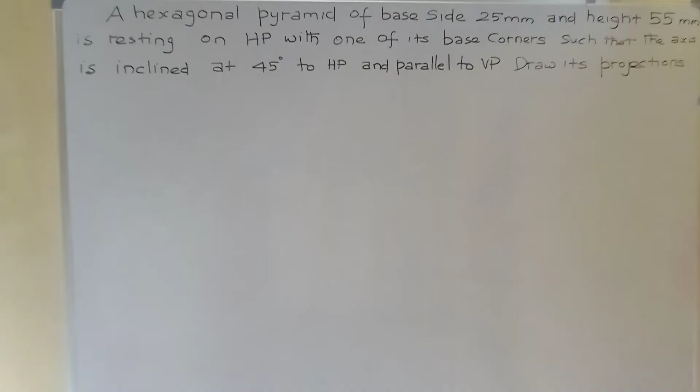Dear students, welcome. Today we are going to solve one problem in engineering graphics from a recent Anna University question paper.

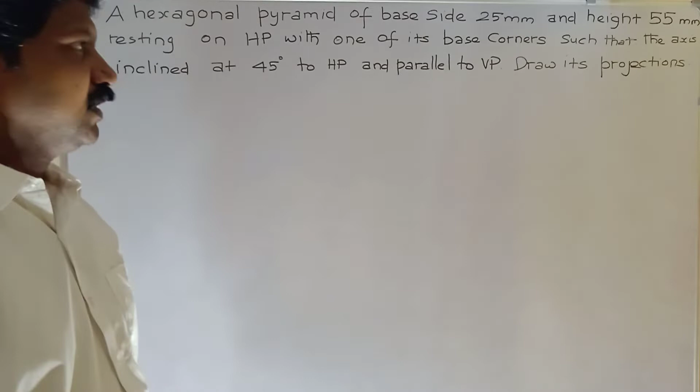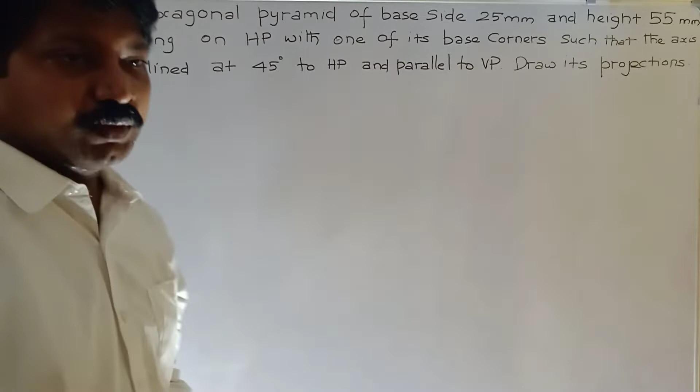A hexagonal pyramid of base side 25 mm and height 55 mm is resting on HP on one of its base corners such that the axis is inclined 45 degrees to HP and parallel to VP. Draw its projections.

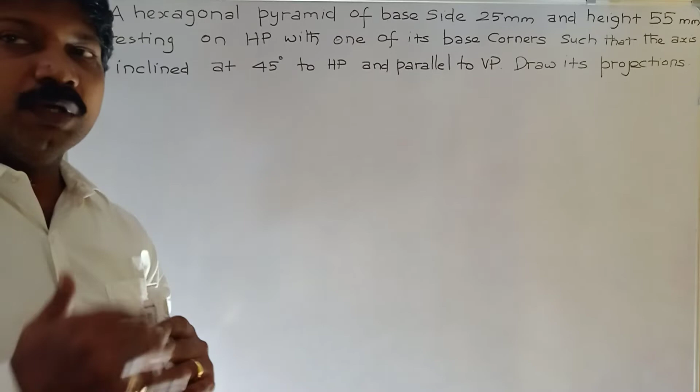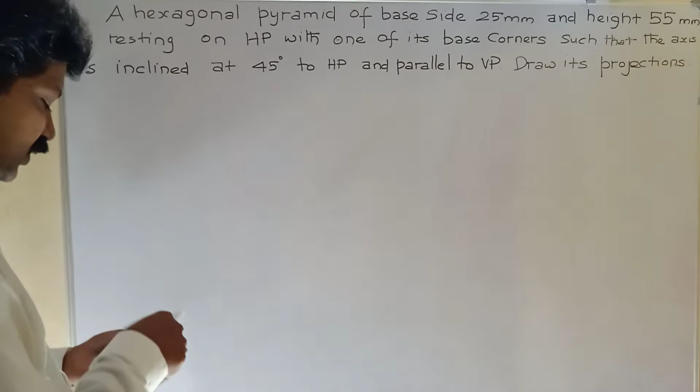So initially you have to assume the base resting on HP, and at the same time one of the sides parallel to VP. Draw the top and front view. And then tilt the front view; automatically the condition of one corner resting on HP is satisfied. So initially, draw the XY axis line using a 2H pencil.

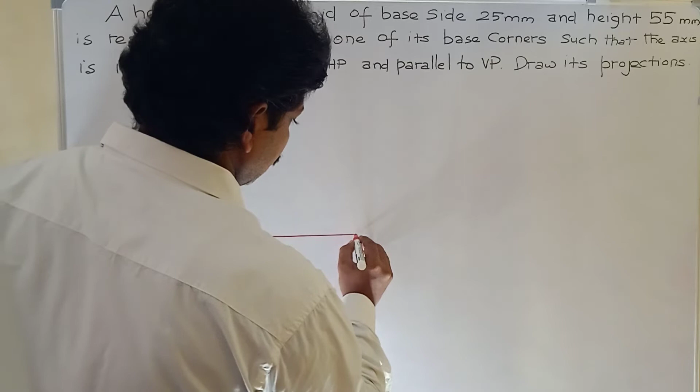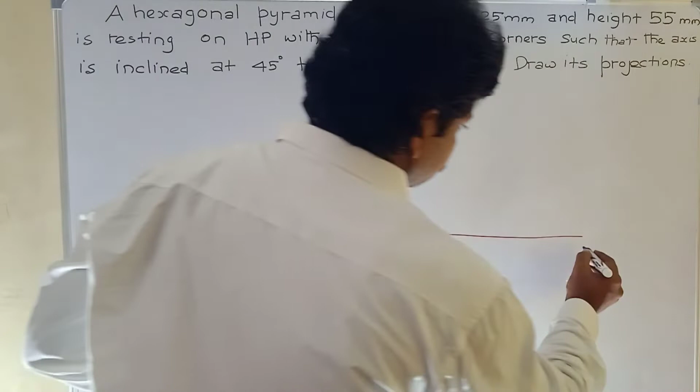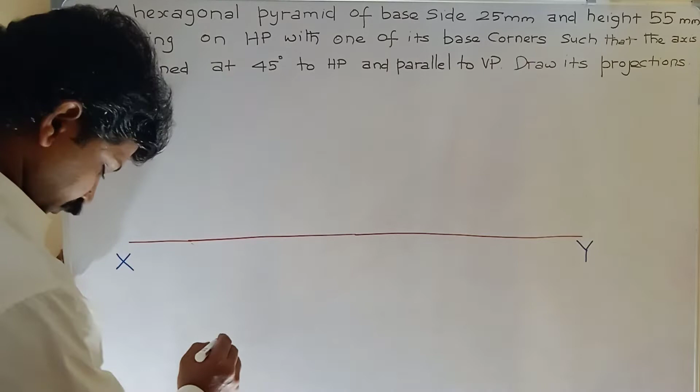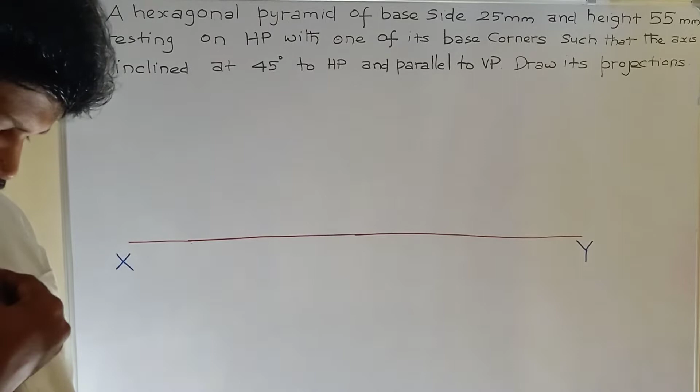Draw the XY axis line. Draw the top view first. Initial position, one of the sides parallel to VP. To draw the hexagon, one simple method is available. Our base side is 25 mm, so take 25 mm as radius. By using a 2H pencil, with 25 mm as radius, draw a circle first.

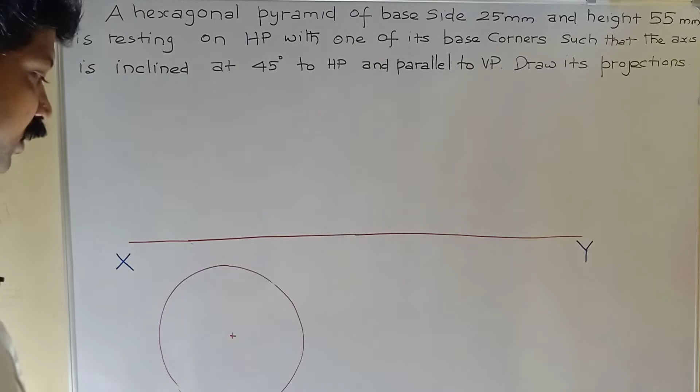Okay, one simple method. In a hexagon, the angle between each side is 120 degrees. Taking 120 degrees for each side will take more time. To avoid that, first with 25 mm as radius, draw a circle. One of the base sides is parallel to VP, so draw a horizontal line crossing the center point.

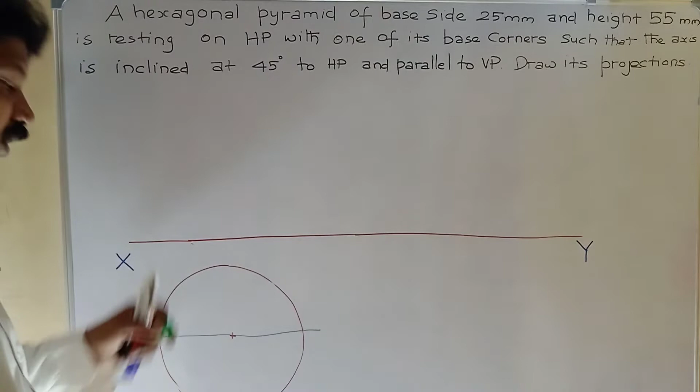From each intersecting point, with the same 25 mm as radius, using a compass, draw arcs on both sides, above and below. Similarly, from this intersecting point, using the compass, draw arcs on both sides with 25 mm as radius.

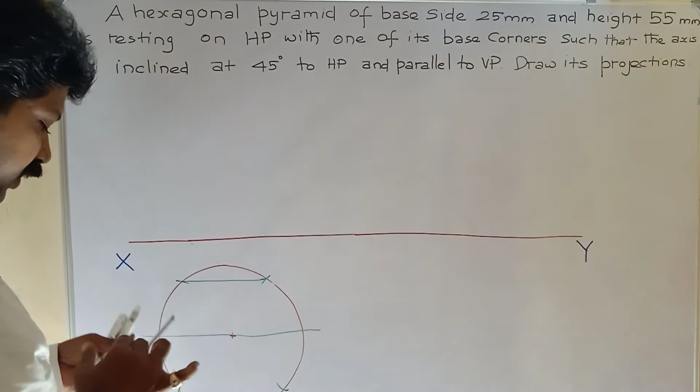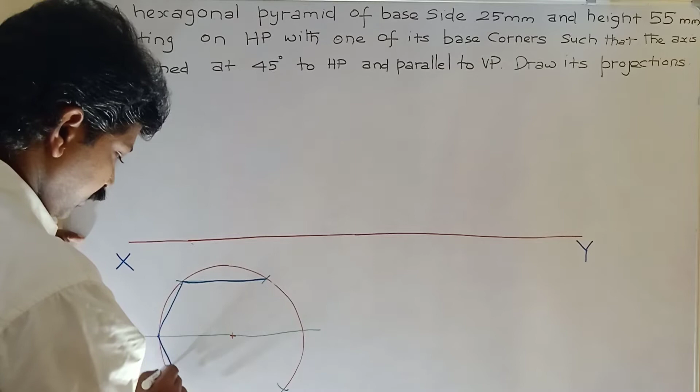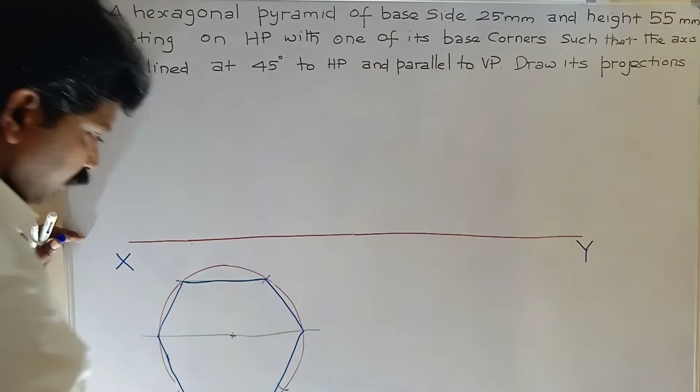Now join all the points to get the hexagonal pyramid. Now draw the slant edges. Join the base corners to the topmost corner, the vertex.

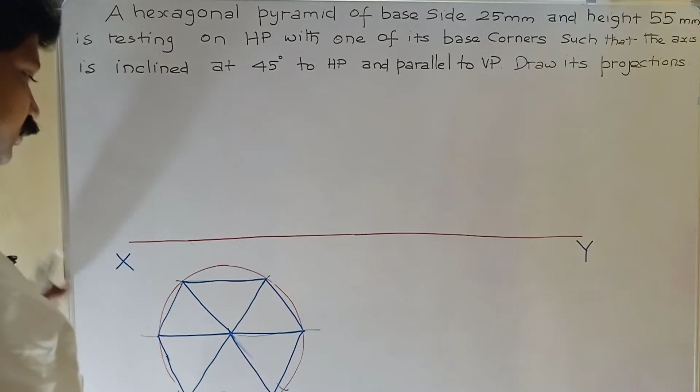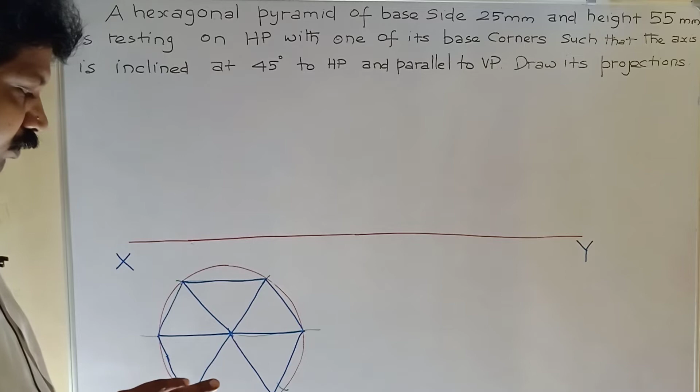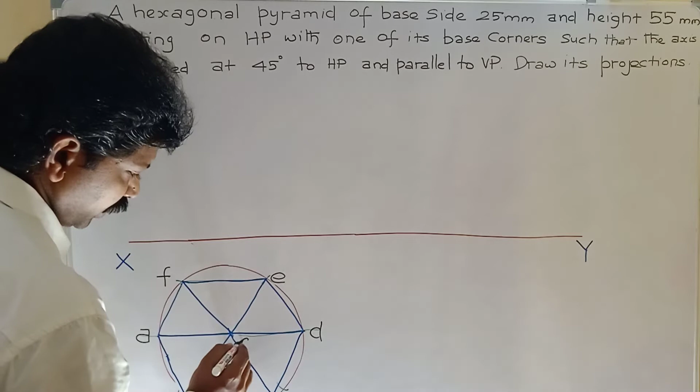Now the top view of the hexagonal pyramid with base resting on HP and one of the sides parallel to VP, condition satisfied. Now give names to the corners: A, B, C, D, E, F, and the topmost corner as O. Okay, this is a simple method to draw the hexagon.

Otherwise, you will take 120 degrees from each corner each time, which will take more time. To avoid that, first draw a circle with the base side as radius using a 2H pencil. Then draw a horizontal line passing through the center point. From each intersecting point, with the same 25 mm as radius, draw arcs above and below. Then join all the points to get the regular hexagon.

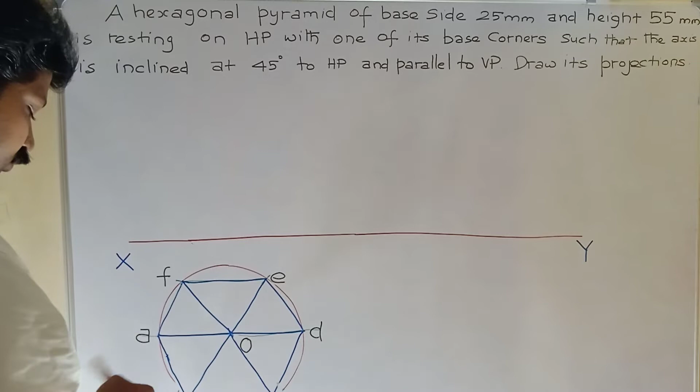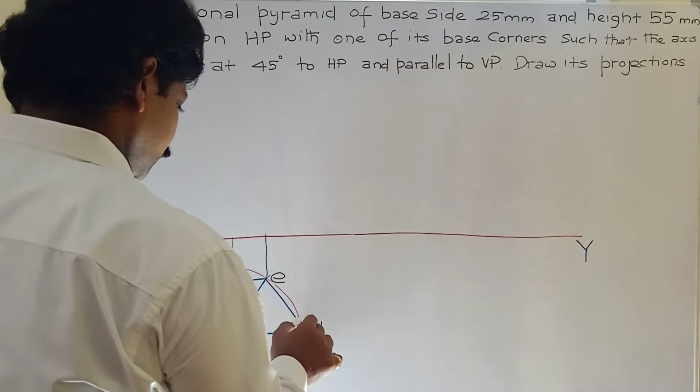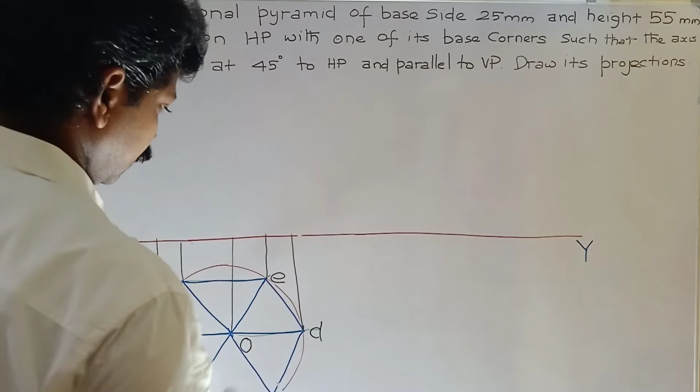And then draw the slant edges. Now the top view at the initial position, base resting on HP, is over. Now project the front view from the top view using a 2H pencil. Our axis height is equal to 55 mm, so draw the front view up to 55 mm height.

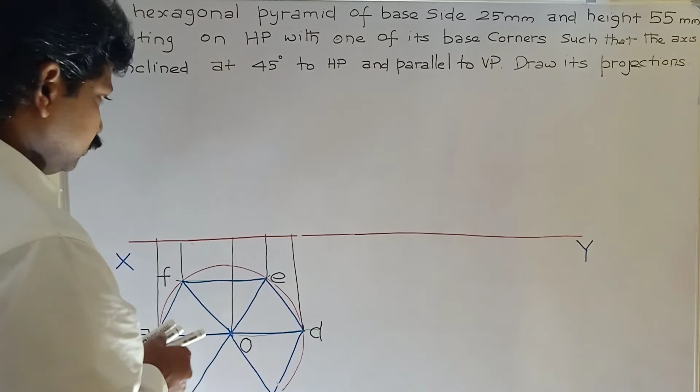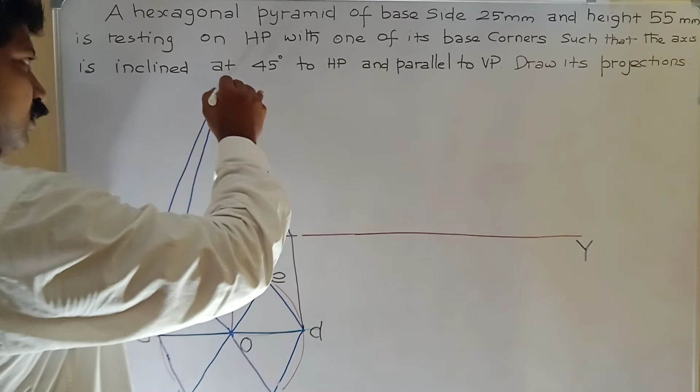Extend the front view up to 55 mm height. Measure the distance equal to 55 mm. And then join all the base corners. Now the front view at the initial position is over.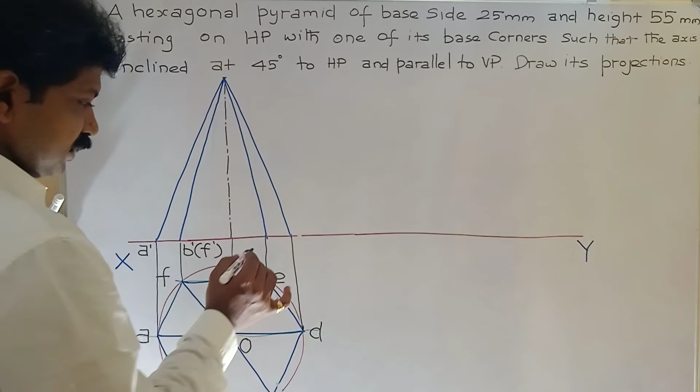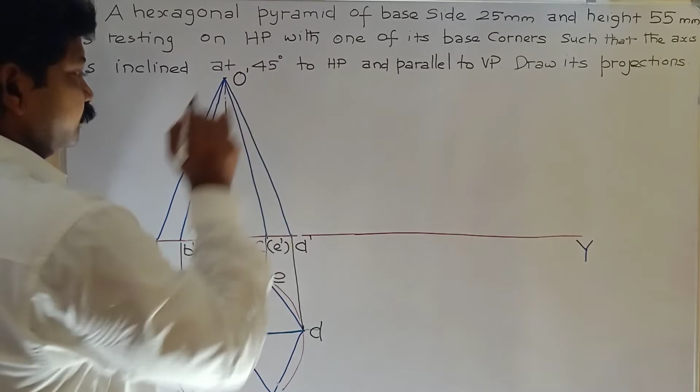So a dash, b dash of f dash, c dash of e dash, d dash. The front view is always represented by small letters with dash, the top view by small letters. O dash. So this base side is 25 mm. Mention the dimension.

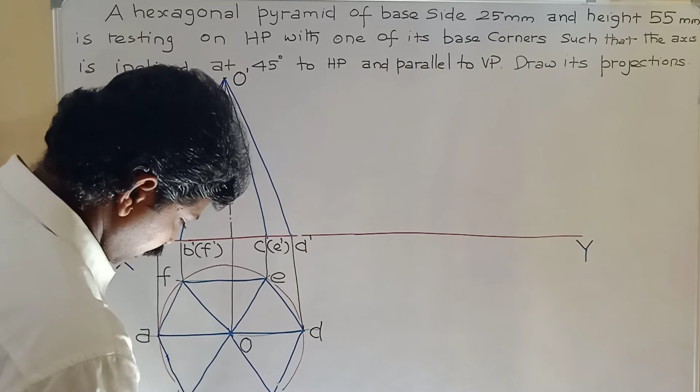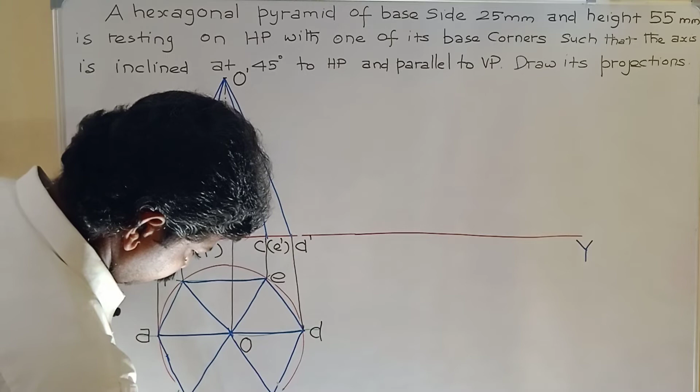By using 2H pencil, draw the dimension line. Write the letters, 25 mm number. Just similarly, our axis height 55 mm. Axis height equal to 55 mm.

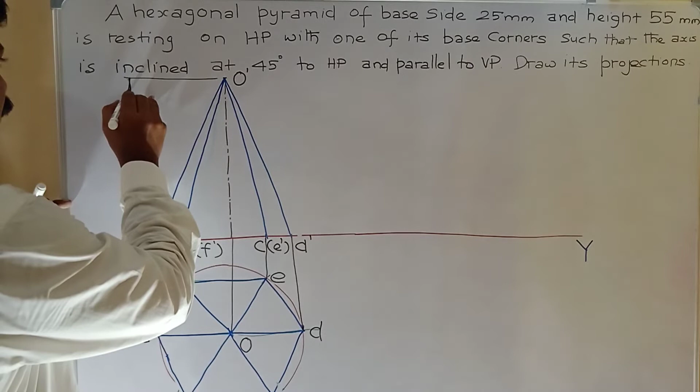Now the top and front view at initial position is completed. We assume our base resting on HP. Based on our requirement, corner resting on HP. So while tilting the front view, automatically the corner D rests on HP. So condition satisfied. So only we have to take this position, initial position.

Now leave some distance and mark a point D1 dash. This is our first point, resting corner. So after marking the first point D1 dash, the axis inclined 45 degree to HP. The axis inclined 45 degree to HP means, listen, axis inclined 45 degree to HP.

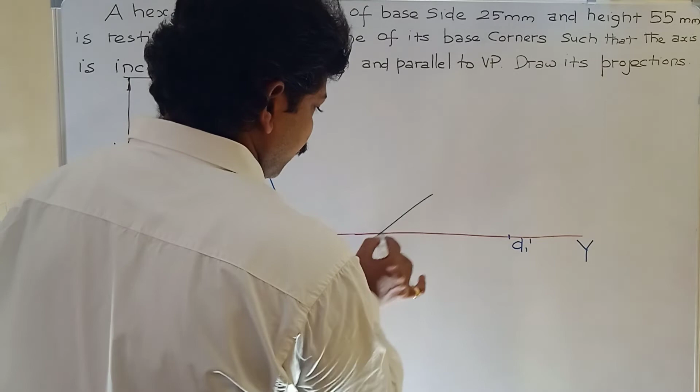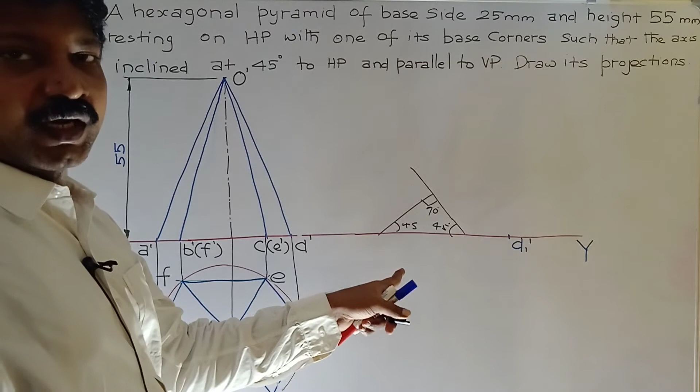So the base with axis is 90 degree. Automatically the resting corner containing base is inclined 45 degree, because it is a right angle triangle. In right angle triangle total angle is 180. So this axis 45 degree means base also makes with HP 45 degree. So for simple drawing method, first mark the point D1 dash and then draw the 45 degree inclined line.

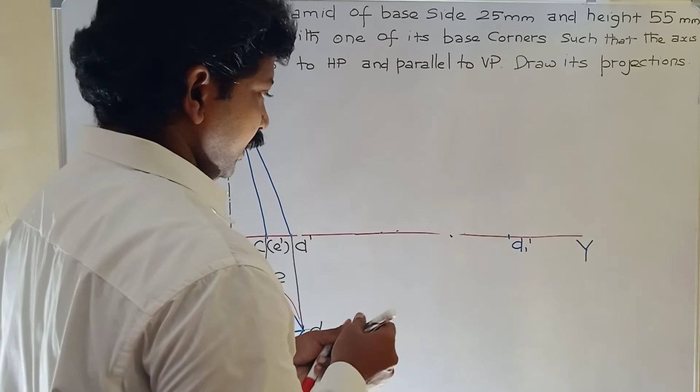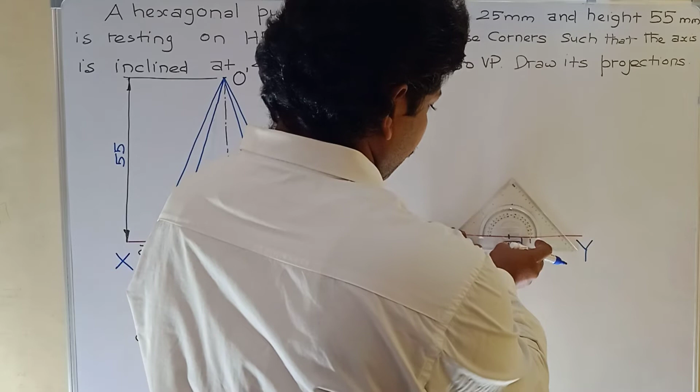45 degree inclined line. So fix the protractor here. Take 45-degree inclination. Draw a 45-degree inclined line.

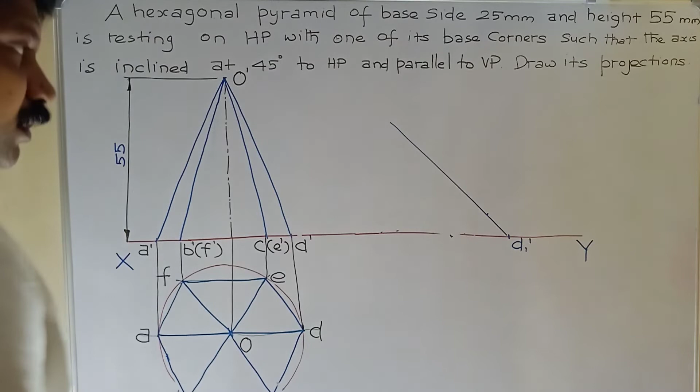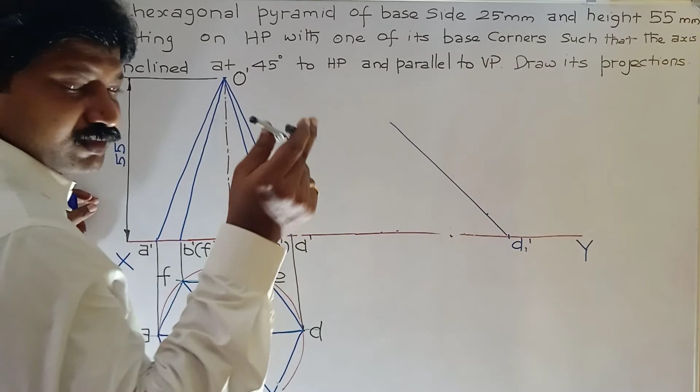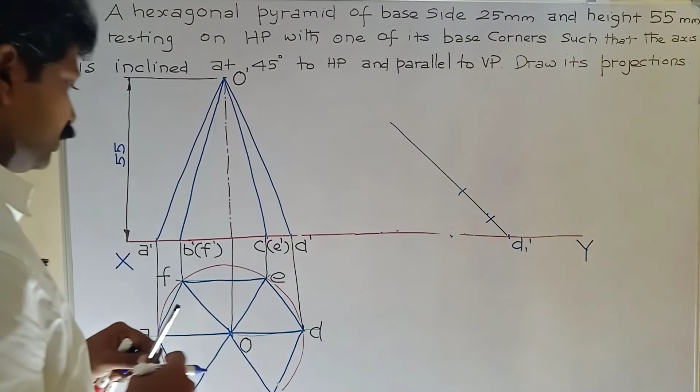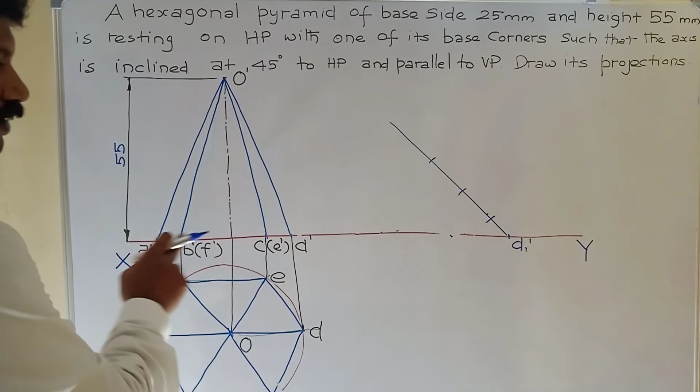Now each point. Take the distance from D dash to C dash or E dash as radius, by using compass, draw the arc. Similarly, D dash to axis distance as radius, by using compass, draw the arc. Similarly, D dash to B dash or F dash distance as radius, draw the arc. And then D dash to A dash distance as radius, draw the arc.

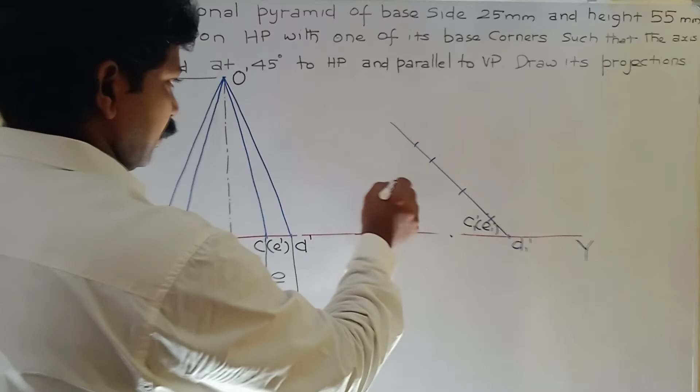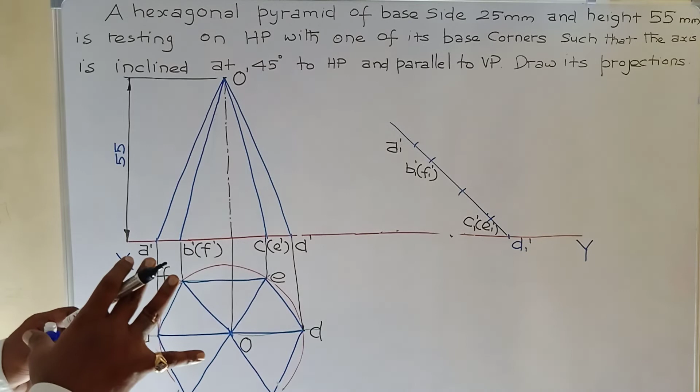Now mark all the points. First point, C1 dash or E1 dash. Axis point. And the next B1 dash or F1 dash. And then A1 dash. Okay. Now the base point marking is over.

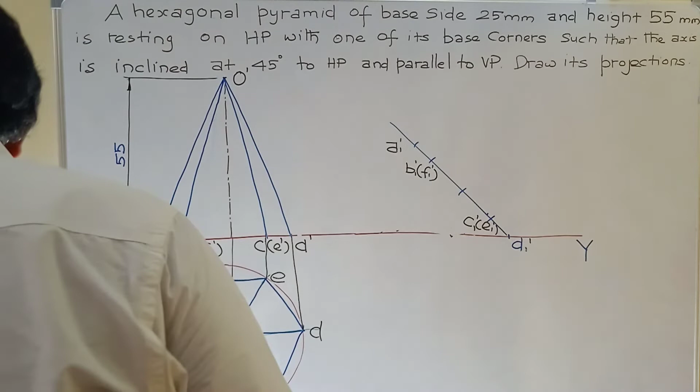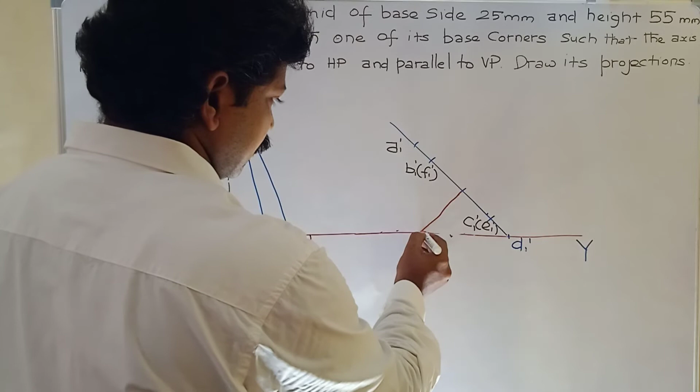Now by using your drafter, it is very easy. One scale coincides with this means another scale is automatically perpendicular. Draw a perpendicular line from the axis point. So automatically the axis inclination with XY axis is 45 degree. The condition satisfied, 45 degree.

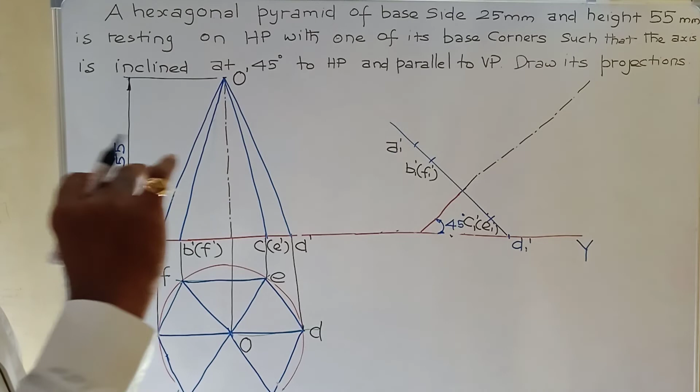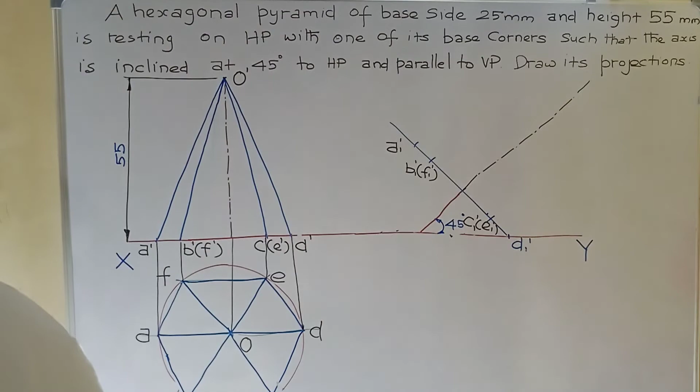Now extend the axis line. We know how to draw the axis line: 5 to 6 mm length line and 1 mm gap, 2 to 3 mm line, 1 mm gap, 5 to 6 mm line. Extend the axis line up to 55 mm length, this length. Okay. Up to this length, extend the axis.

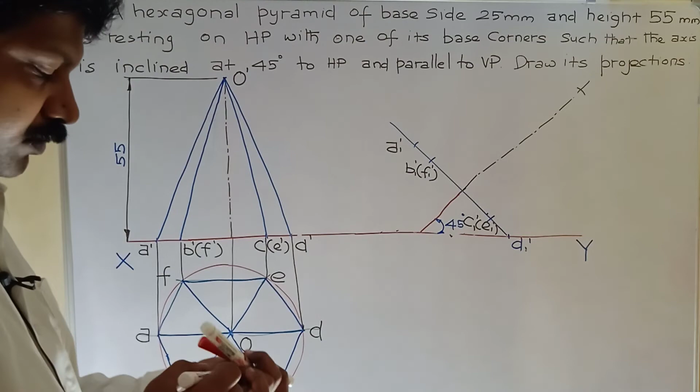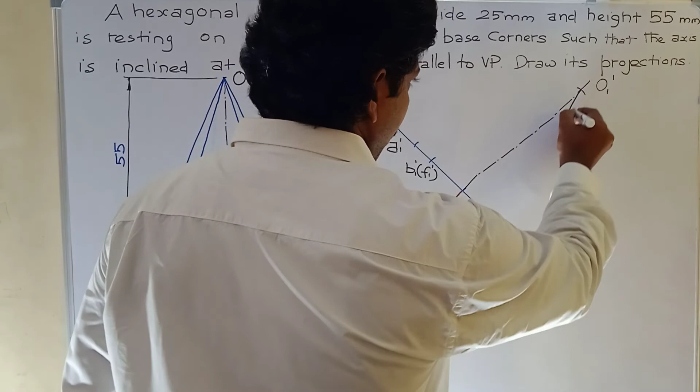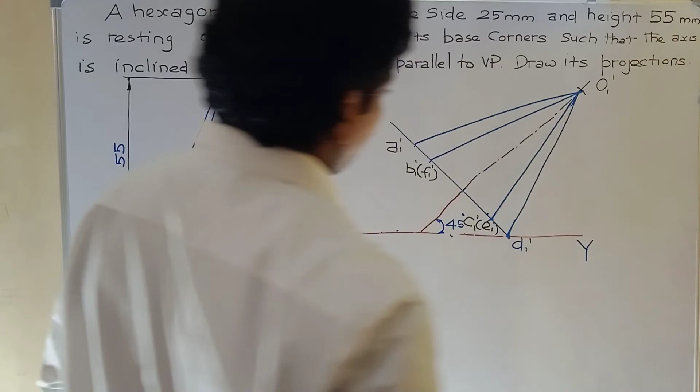Now mark this point as O1 dash, vertex point. Now I'll join all the points to the base corners. Okay. Now the final front view is over.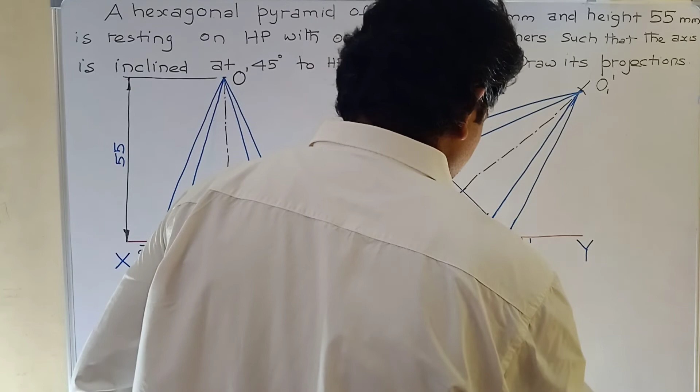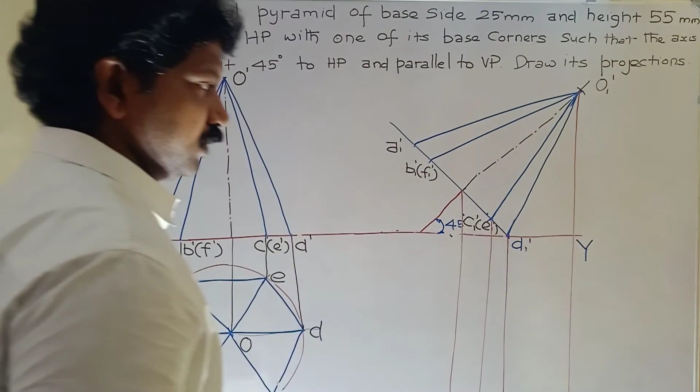Now draw perpendicular line from each corner to the bottom, downward direction. By using 2H pencil, draw a perpendicular line. Okay, and then draw a horizontal line from the top view.

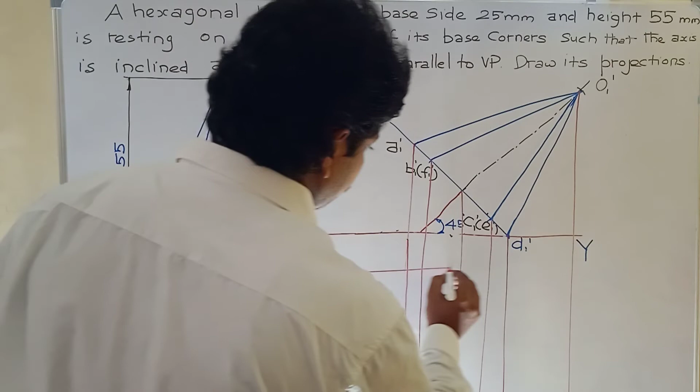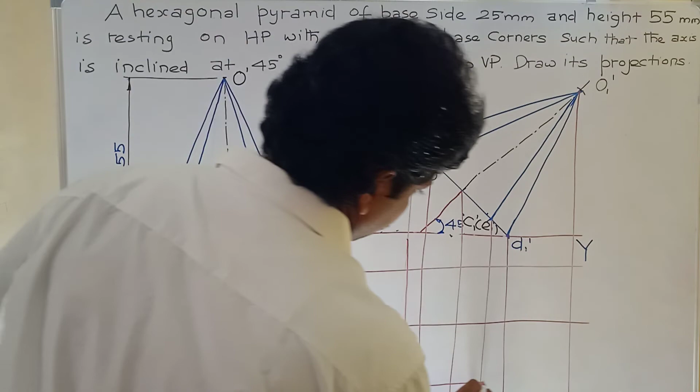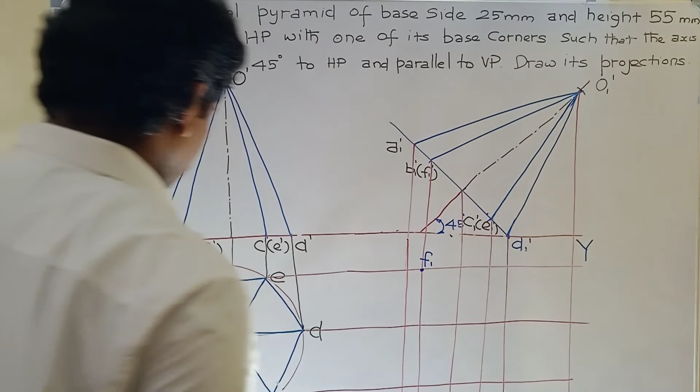Now mark all intersecting points to get the final top view. F and F1 dash intersecting point as F1. A and A1 dash intersecting point as A1. B and B1 dash intersecting point as B1. Okay, similarly mark all intersecting points to get the final top view.

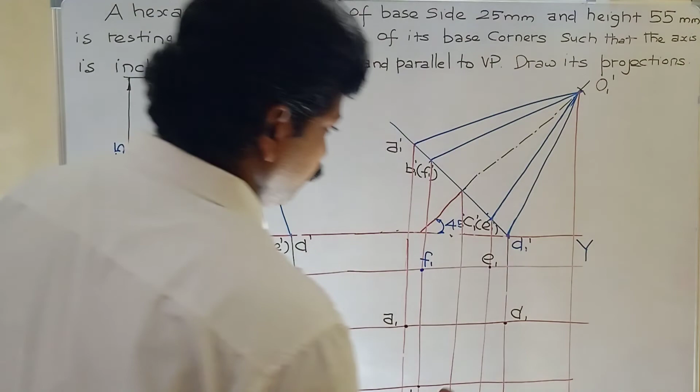E and E1 dash intersecting point as E1. D and D1 dash intersecting point as D1. C and C1 dash intersecting point as C1. Okay. And O and O1 dash intersecting point as O1.

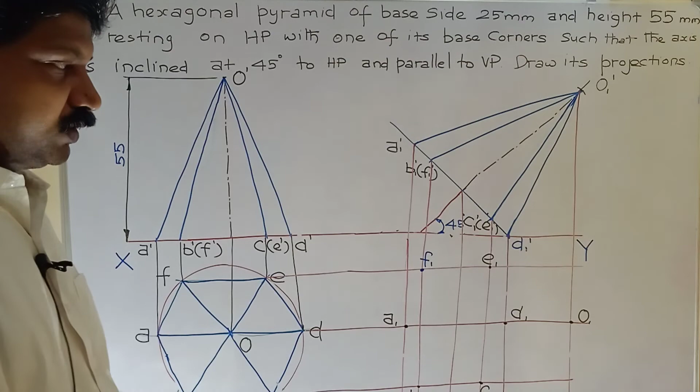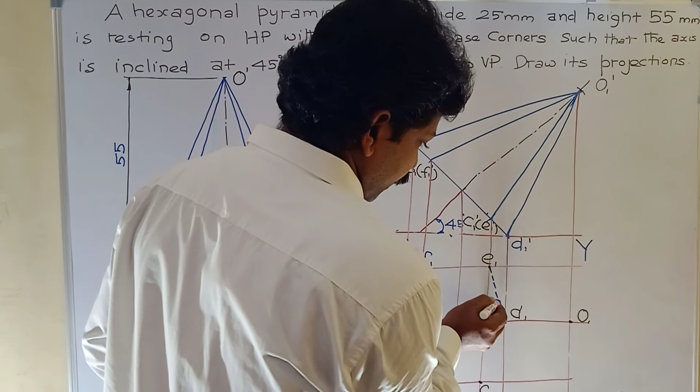Now, in top view, E1 D1 and C1 D1 are invisible edges. So, mark the invisible edge by using H pencil dotted line. The invisible edge: 2 to 3 mm line and 1 mm gap. The remaining edges are all visible. So, dark line.

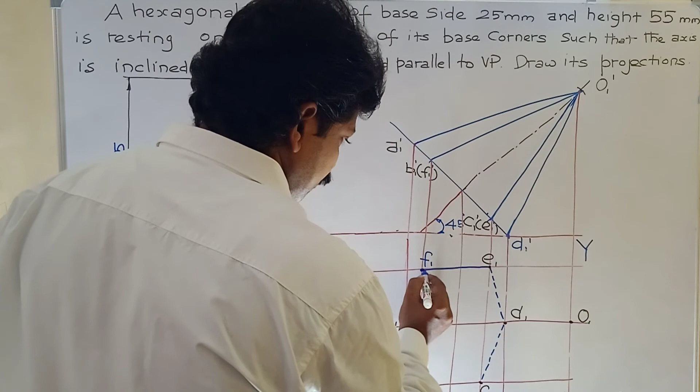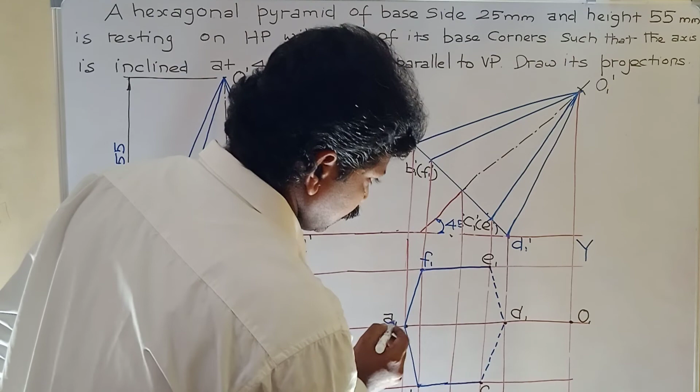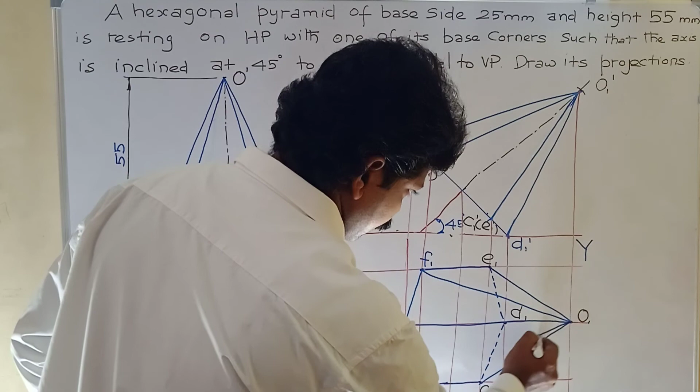Okay, now join with the vertex. Draw the slant edges. All the slant edges are visible except O1 D1, invisible, but O1 A1 coincides with O1 D1. So draw a straight line. Okay. So only two edges are invisible, E1 D1 and C1 D1.

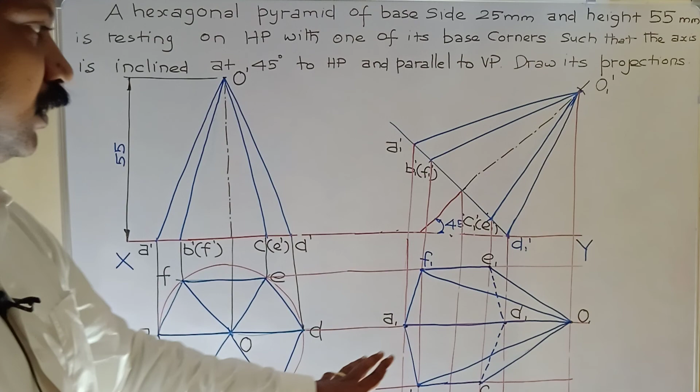So check once again whether all the given conditions are satisfied. Base edge 25 mm, axis 55 mm, corner resting on HP, axis inclined 45 degree with the HP, and axis parallel to VP. All the conditions are satisfied.